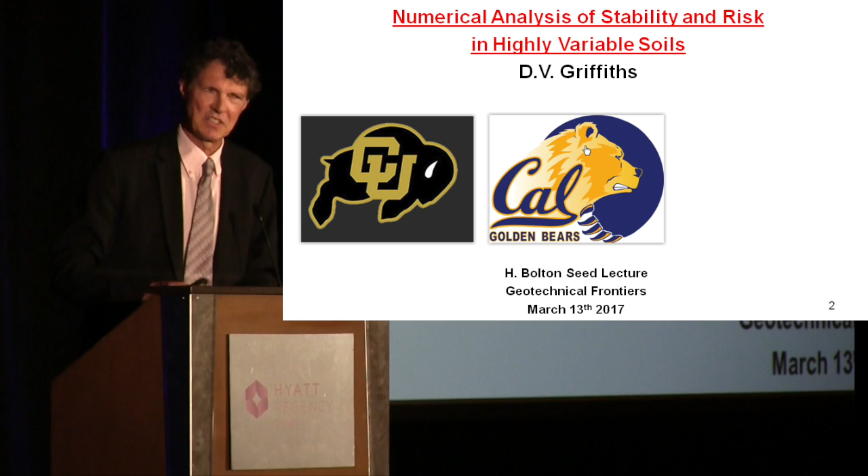So it's really a little bit surreal to be here today, giving the lecture in his name. I've put up a picture of the Cal Berkeley logo, which of course was where Harry Seed made his name and where he stayed for many years. But it did make me reflect briefly on the universities I've had connections with since I've been in the United States. I've had an associate professor's position at CU Boulder - they have to call themselves CU because the UC has already been taken. And at one time I was also on a sabbatical in Princeton.

It kind of occurred to me that these are all rather fierce-looking animals, these mascots. So when I ended up at the Colorado School of Mines - anyway, he's got some dynamite in his mouth, which is sort of a little bit, no one's ever explained it to me properly.

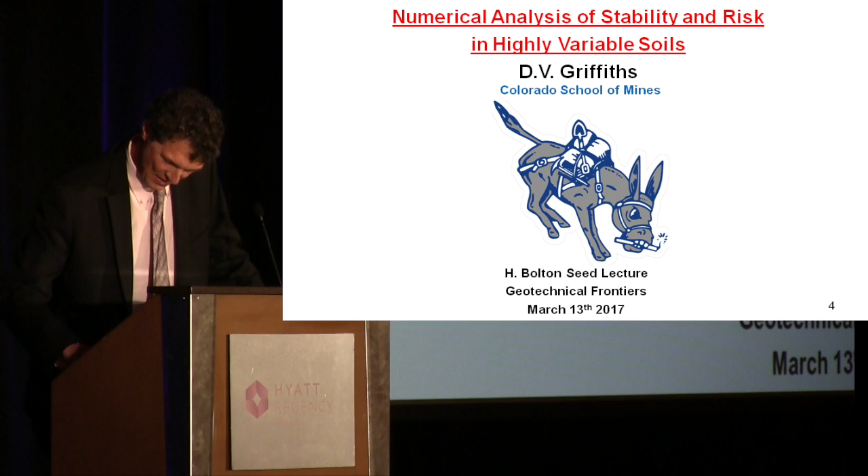Anyhow, I'm very pleased to be here. You know, when I arrived in Berkeley, Harry Seed looked like that, and unfortunately I looked like that. But nevertheless, Professor Seed was extremely accommodating.

I was his teaching assistant for his 270A class that was a staple of the large graduate program in those days. Just one other anecdote, if I may.

I visited Berkeley. In fact, the last time I saw Harry Seed in Berkeley was with my late wife, Valerie. And we visited Davis Hall, where Harry Seed had his office, on the day of a very significant earthquake by the standards of the Bay Area in those days, 1979, August the 6th. Incidentally, that's the same year that Harry Seed gave the Rankine lecture in London.

And I was on my way to Davis Hall, and I was in an elevator going up to the 4th floor. And when the doors opened, people ran into the hallway. There's been an earthquake, and I'd missed it. And to this day, I've never felt an earthquake.

It was fascinating because Harry Seed and Mike Duncan took us to lunch that day in the faculty club, and it was quite an occasion. When I got back to the faculty club where my wife was staying later, she said, I forgot to mention it really - she said, was there an earthquake? I saw the paintings swinging on the walls. So anyway, that was a remarkable day.

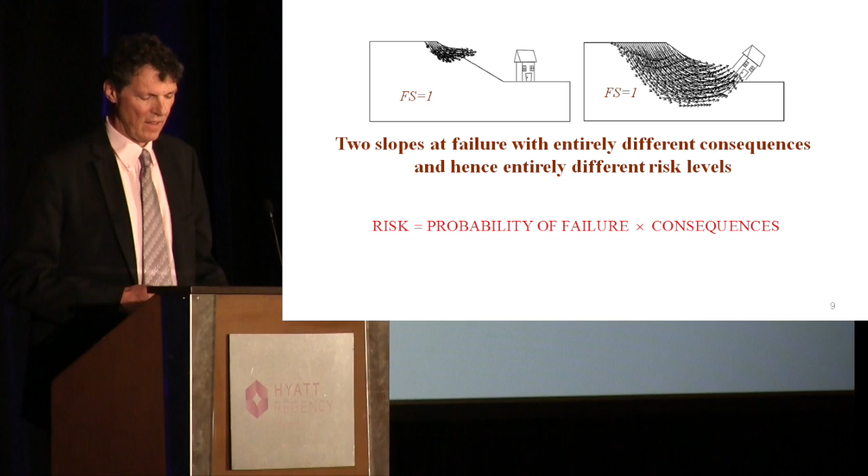Here we have a couple of slopes, both with the same factor of safety of 1. They both failed, but clearly one has much more significant consequences than the other. And here straight away is one of the benefits of bringing in a risk way of thinking. The probability of failure, weighted by the consequences of failure, is the definition of risk. So one can tolerate higher probabilities of failure if the consequences are low.

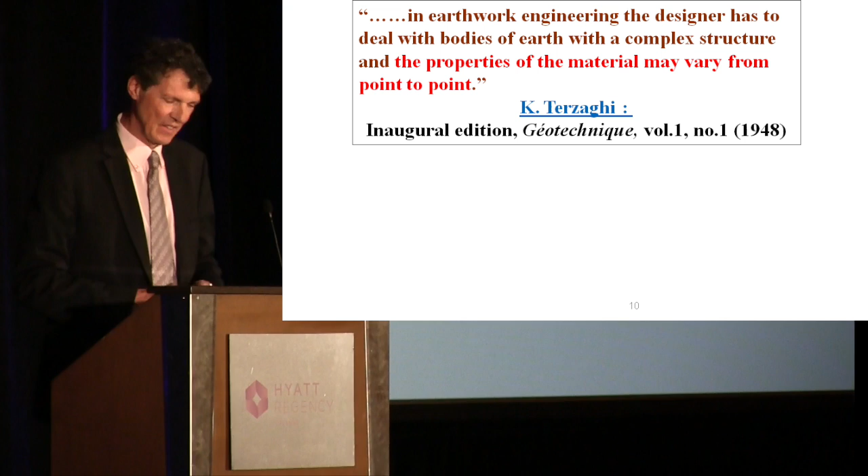There's few engineering materials, I think, that are more amenable to a probabilistic treatment than soil and rock. I'm on the Geotechnique panel nowadays, and looking at volume 1, number 1, they got someone called Karl Terzaghi to say a few words in the preface, and it's interesting to see how he highlighted - the properties of materials may vary from point to point. This is what makes soil complicated stuff compared with other engineering materials.

And incidentally, the same year, a very influential book, I think, by D.W. Taylor was published, where in his introduction he also drew attention to this inherent difficulty in geomaterials. How do you model these things when the properties are varying all over the place?

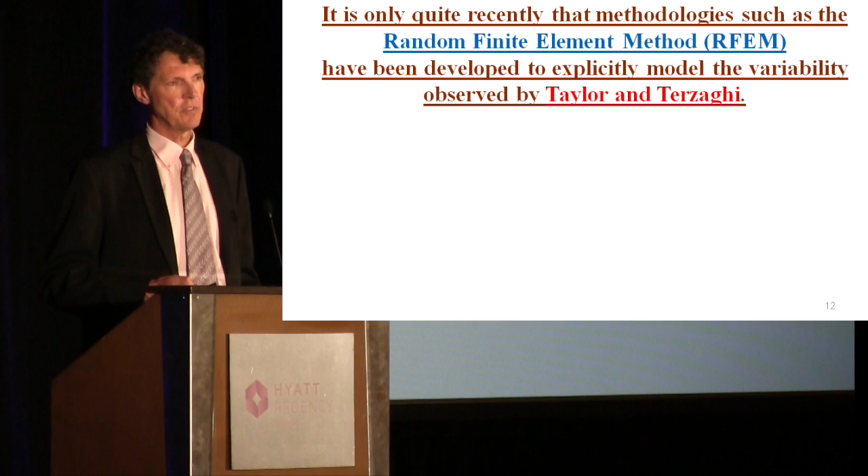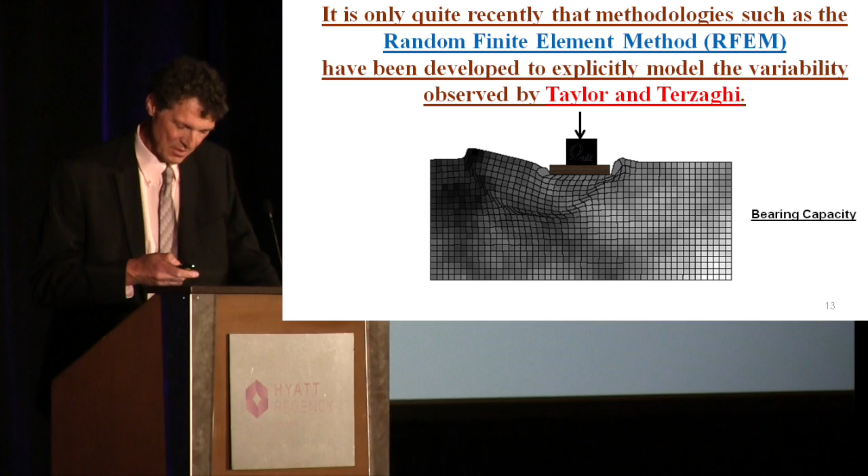A little bit more about this method later. The dark and light zones refer to a whole spectrum of strength parameters. It's funny, when you have a random material or a variable soil, quite rarely do you get the classical symmetrical mechanism that you would see in textbooks of Terzaghi's bearing capacity theory. It nearly always goes one way or the other.

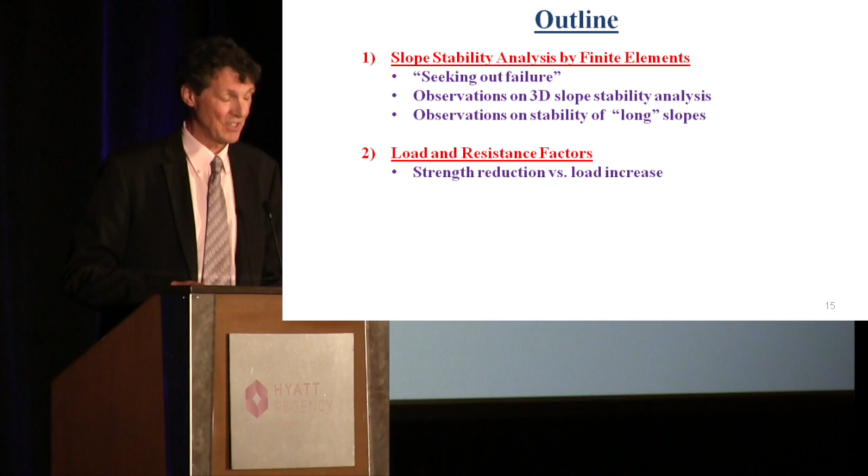Here's an outline of my presentation. I'm going to talk initially about slope stability by finite elements, which seems to be a growing topic of usage in practice and academe, and I'll make a few observations about the benefits of this approach. Then, maybe slightly out of context but something that's interested me recently, the growth of LRFD as a way of dealing with variability by factoring the loads and resistances differently. Maybe you have more than one factor of safety going on at the same time. I will briefly review risk assessment tools in geotechnical engineering, but we won't get too deeply into them today. I'll summarize what I call 3 levels of probabilistic analysis, and then some concluding remarks.

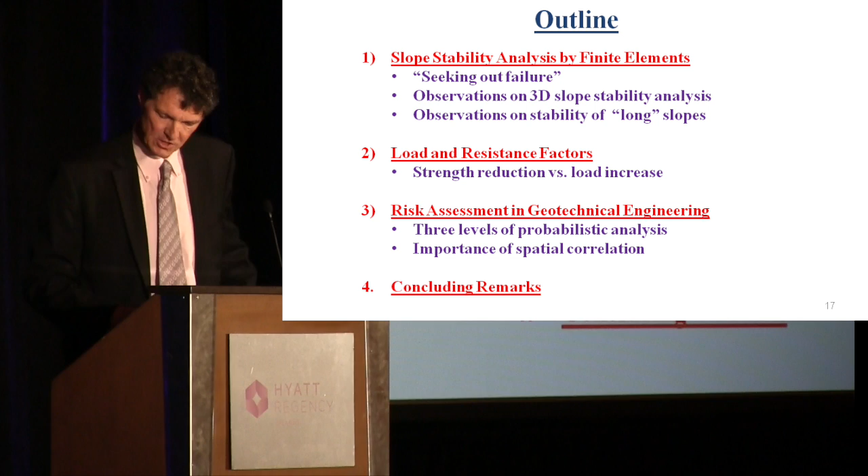So let's move on. What is slope stability by finite elements? Well, you design a finite element mesh to represent the geometry of your slope, which could be quite complex. We apply some gravity loads to that slope based on the unit weight of the soil. That's a fairly standard algorithm in finite element programs. We'll have a very simple stress-strain law, elastic, perfectly plastic, and the plastic plateau is governed by Coulomb.

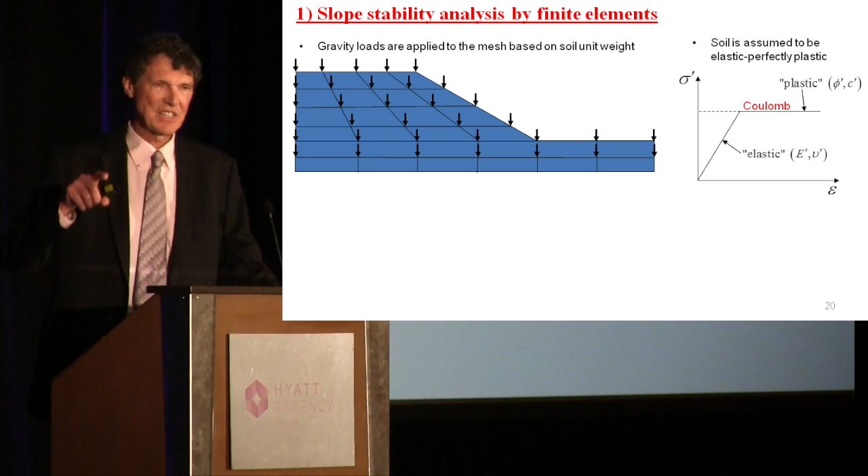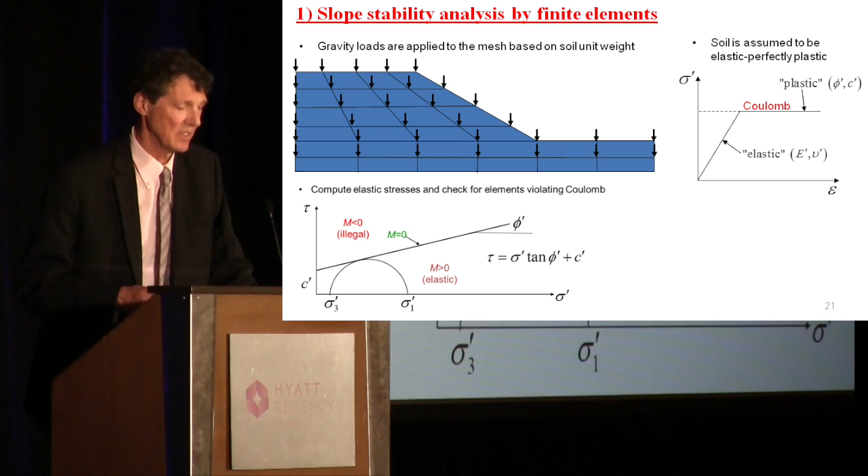Then we'll do an elastic analysis initially. Forget the plasticity, forget Coulomb, we'll just do an elastic analysis. We'll look at each element to see if they have violated Coulomb. So we have a little function called m. If m is negative, we're in illegal territory, and we shouldn't really be there. If m is positive, then we're still elastic, and probably things are okay.

If an element is violating Coulomb, we're going to turn on a little stress redistribution algorithm that will sort of move the stresses around a little bit. Offer the stresses to the neighbors and ask them to pick it up. In their turn, it may cause them to violate Coulomb if they pick up some load from the neighbors. So this is an iterative algorithm, and it may take quite a few iterations for everything to settle down, for all the elements to satisfy Coulomb, and of course equilibrium — all the stresses can be moved around, but they must still satisfy equilibrium with gravity.

To find the factor of safety, we'll use a strength reduction approach, which means we gradually weaken the soil by dividing by an ever-increasing strength reduction factor until nodal displacements in our mesh rapidly accelerate. When this happens, along this top axis here, you'll see the strength reduction factor being increased. At some point, something pretty critical happens — the displacements magnify very quickly. At that point, the strength reduction factor is the factor of safety.

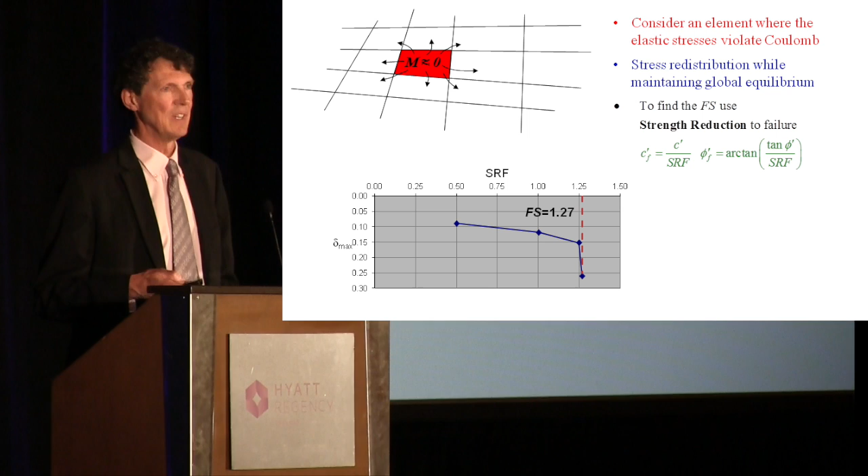This is the same definition of the factor of safety that is used by Bishop or the ordinary method of slices or any other method. It's just come at it from a slightly different direction, but this is the same factor of safety.

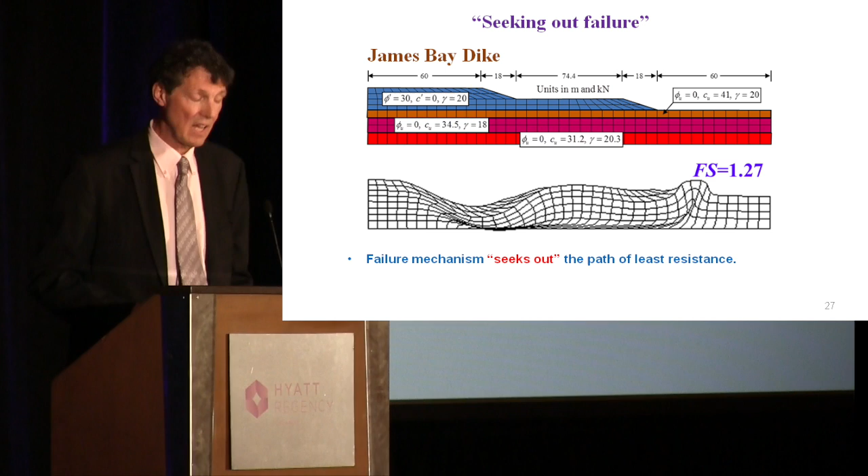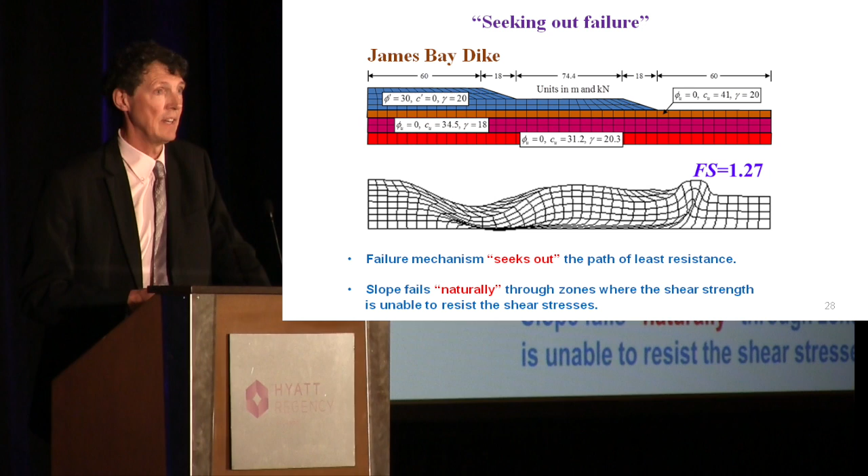One of the benefits of the finite element method, I think, for slope stability is that it seeks out the critical failure mechanism. It finds the weakest path through the soil where the strength is unable to satisfy the stresses that are being asked to support. The user doesn't have to, in advance, anticipate where the failure mechanism will be — the critical failure mechanism comes out of the analysis automatically.

We can see some other interesting examples. This is a layered soil in which we did strength reduction — 3 different undrained clay layers. Here, in fact, we have 3 mechanisms all occurring with the same factor of safety. I just ask on the right whether a traditional limit equilibrium approach would be able to find all 3. I wonder if you were using limit equilibrium, you might find one and think that was it.

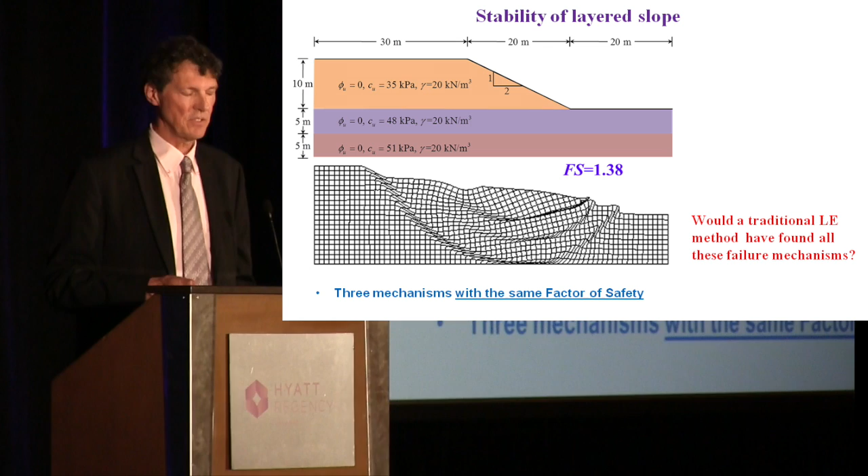Even if the limit equilibrium method could do this, and I'm sure you could with sufficient search, this comes out naturally from the analysis without the user having to tell it where to look.

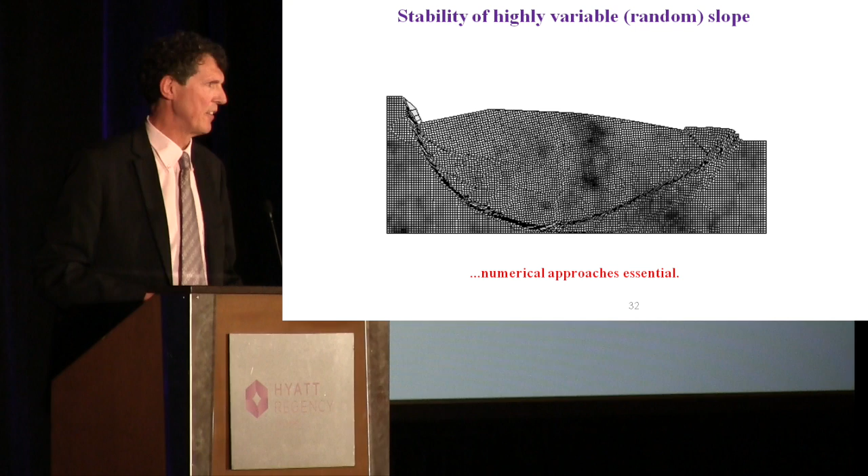So what hope is there for a random field then, when we're trying to find the stability of a slope with highly variable soils varying according to some statistical distribution? I think a numerical approach is essential for this kind of complex problem, where we have circular and planar type failure mechanisms, and also some curious little berm type failure up here.

One thing also about the finite element approach which I find intriguing is how robust it is. Even coarse meshes, while they don't give you quite such a nice failure mechanism as a fine mesh, they all give very similar factors of safety, and this is a benefit. I think the user doesn't have to worry about mesh design quite as much as you would imagine. Certainly other methods, for example, limit analysis methods, do have problems sometimes with mesh design.

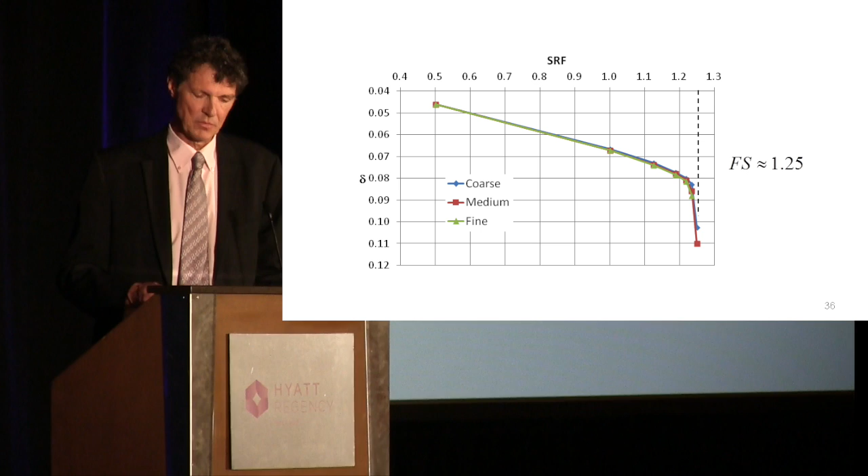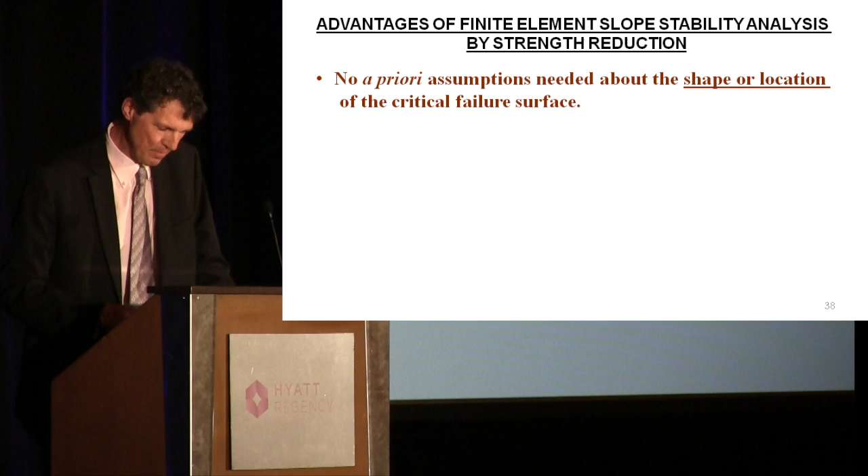So just to summarize then, what I believe are the advantages of the finite element approach for slope stability is: we don't have to make any a priori assumptions about the shape or location of the critical failure mechanism. It's been numerous times we've validated it against limit analysis, limit equilibrium, and chart solutions.

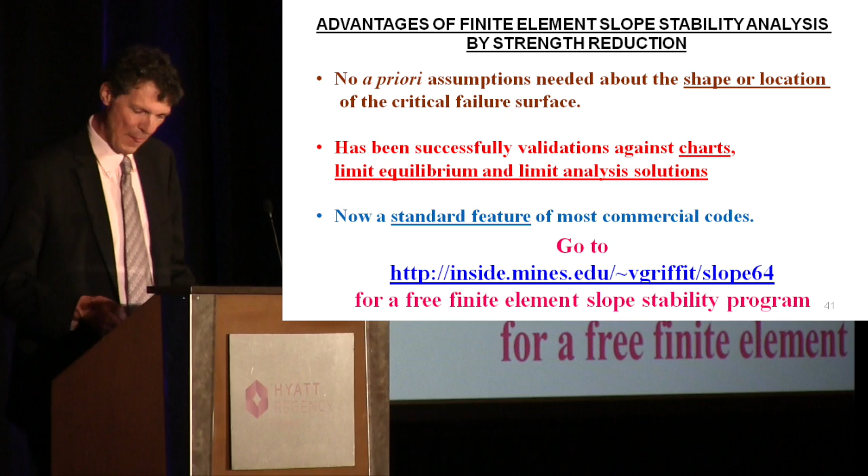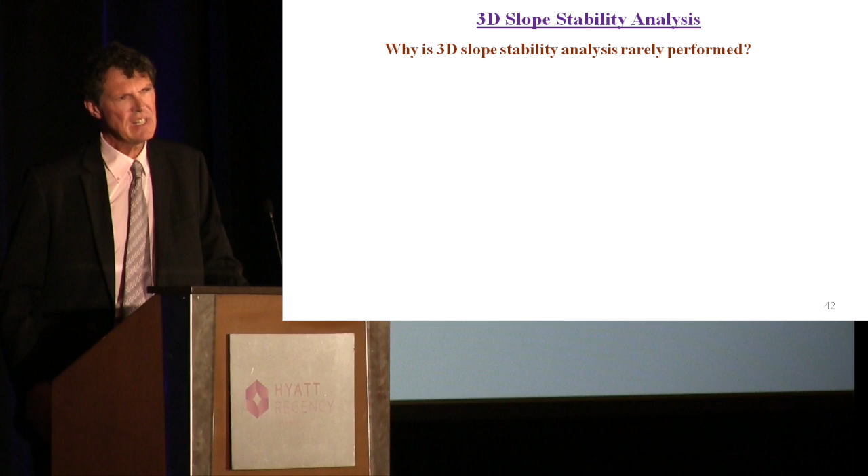A couple of other quick examples just to show where I think we can benefit from the finite element approach: 3D slope stability analysis, and my apologies to one or two of you who've seen this one before, probably. But 3D slope stability analysis is rarely performed, and I think there are 2 main reasons for that. Limit equilibrium methods become pretty messy in 3D.

Methods of slices become methods of columns, and imagine the mess we get into with side forces and all that stuff. In a finite element approach, I think it's more of just a third, if you're into Fortran, a third do loop would get you to 3D from 2D.

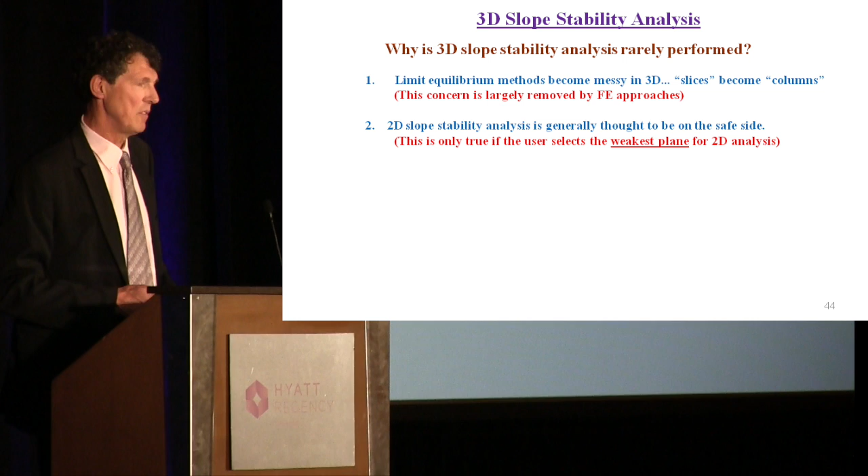The other point I think that is more or less a received wisdom is that 2D is generally thought to be conservative, on the safe side. So why bother, go to all that trouble?

My point in this 2 or 3 slides here is just to emphasize point 2 a little bit. I think 2D is conservative, so long as the most critical 2D section is selected. And that may not be obvious. Which is the best 2D section, the most conservative?

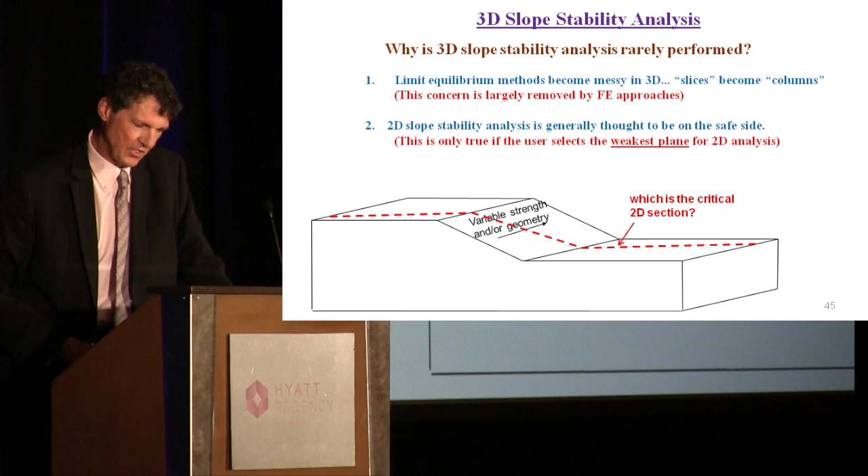To look at this, we set up a rather contrived problem here: a slope with a diagonal layer of weak soil running from top left to bottom right, and ask the question, which is the critical 2D section for this particular problem? Maybe it's one of those, just going right across the section, perhaps. Or maybe even the one right down the weak zone, a little bit flatter, that slope, but entirely weak.

So we ran all these by finite elements. And by the way, there are 3D programs available for download if you're interested. A genuine 3D slope strength reduction approach gave us a factor of safety of 1.52 for this slope. So if I may, I would like to call that the factor of safety of this slope, 1.52, based on our usual understanding of a factor of safety.

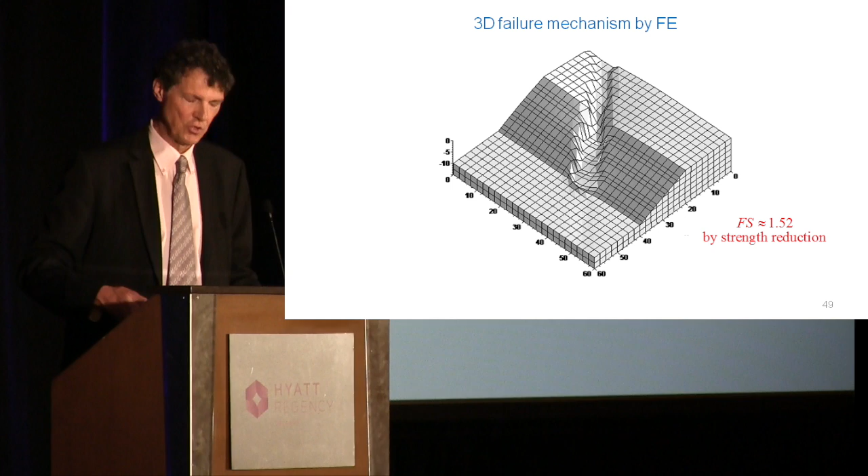I suppose some people would naturally say, well, only a fool would take a 2D section out on the edges where all the soil is strong. I accept that, so the 2D section is safe in the middle. The 2D section right down the weak zone with a flatter slope was tremendously conservative. I think even by our standards, we would have thought that was overdoing it a bit. But the truth is, 2D sections are conservative so long as we choose them carefully, and that may not always be obvious.

Another game we can play with the finite element approach is to ask a slightly flip question: how long is an infinite slope? How long is infinity? I think teachers of geotechnical subjects love the infinite slope because it's a nice closed form solution. It's the only slope, I think, that has a formula for Fs equals, and there it is on the right.

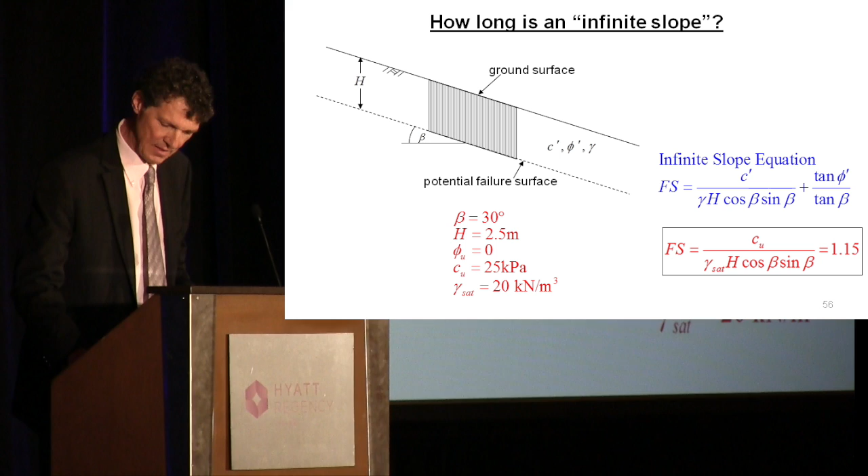If we take a particular case, let me choose some properties. If I fix the properties and the slope angle as shown here, we will get a factor of safety of 1.15 by using the traditional infinite slope equation.

So let's have another look at this with a finite element model of a long slope. How long is long is the question we're trying to address here. L is this width at the bottom of the figure, and H is the thickness of the soil.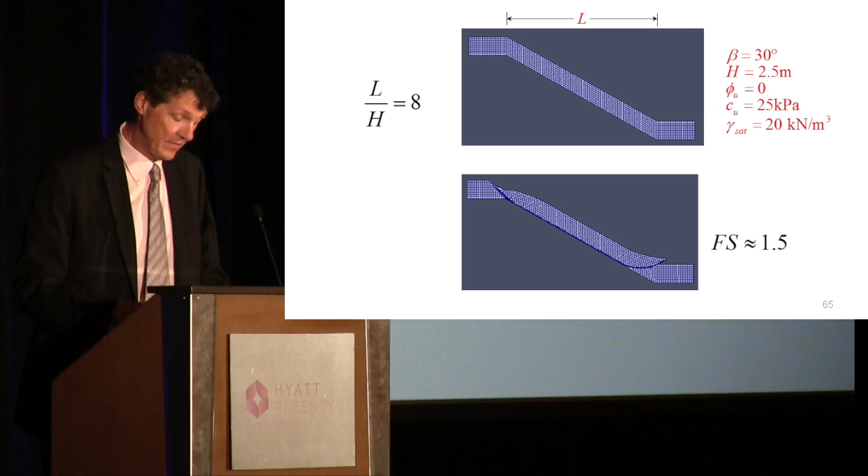If we lengthen it further, we're starting to get the translational type mode of failure, which is central to the infinite slope equation. Then I'm giving up after 8, so don't worry, there's no more, but L over H of 8 is now starting to resemble at least a translational failure. But the factor of safety is still quite a bit higher than the infinite slope.

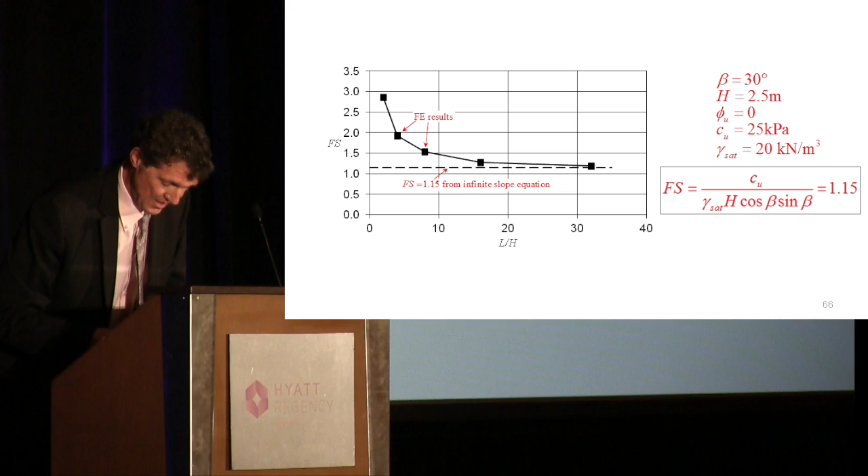Here is a summary. The horizontal line is the infinite slope solution, and here are the finite element solutions with increasing L over H. We can conclude a couple of things, probably not exactly new: the infinite slope equation is conservative. You're on the safe side for sure if you use it. And it seems, at least for the particular properties I chose, that when you get to about L over H of 20 or more, we're roughly in the ballpark of using an infinite slope equation without it being too conservative.

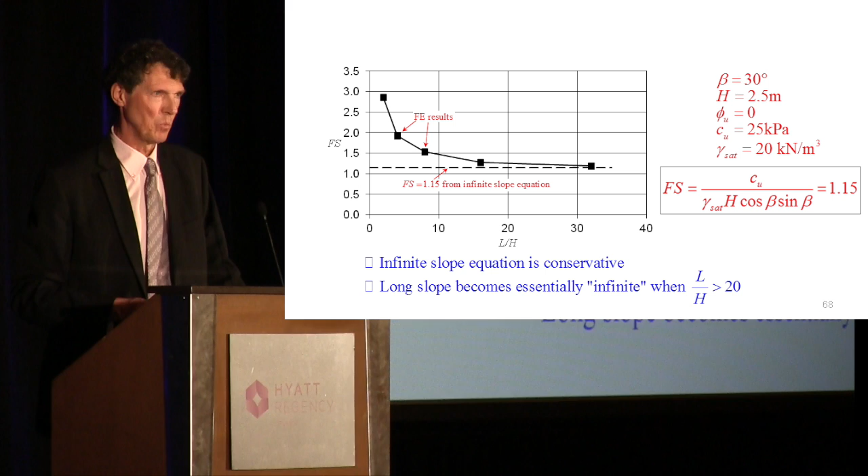Okay, part 2 of my presentation is just a few words on load and resistance factors. I think the geotechnical community have sort of realized that this is something that may be here to stay, where we increase the loads by some factor to be on the safe side, and we reduce the strengths by some factor to be on the safe side. But we can tailor those factors according to how much we know about the various aspects of the design. So it's certainly a logical approach, but I suppose there's some dismay at the plethora of factors compared with the nice world where we used to have just one.

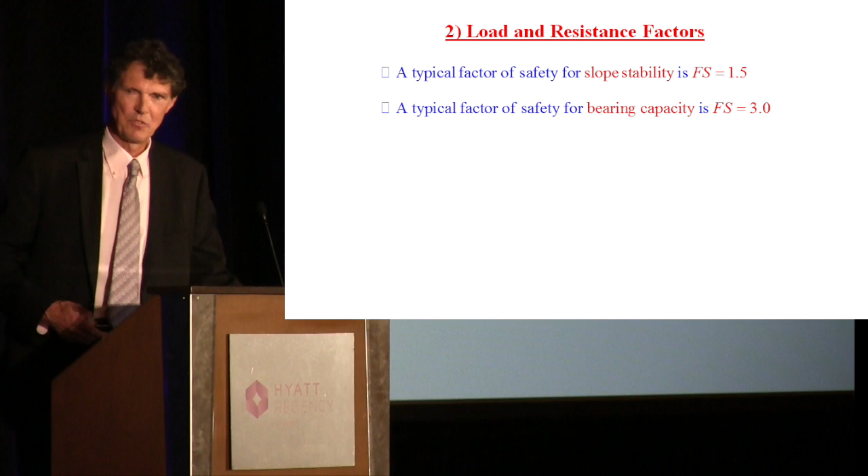Really, it's that one factor of safety I want to look at quickly here. I've taught soil mechanics and foundations quite a few times over the years. Slope stability problems have a factor of safety of 1.5, and bearing capacity problems have a factor of safety of 3. What's that? It never seems to say anything except in Duncan and Wright's book, which is about the only place where this is explained slightly. But my question then is, does this mean we design foundations to be twice as safe as slopes?

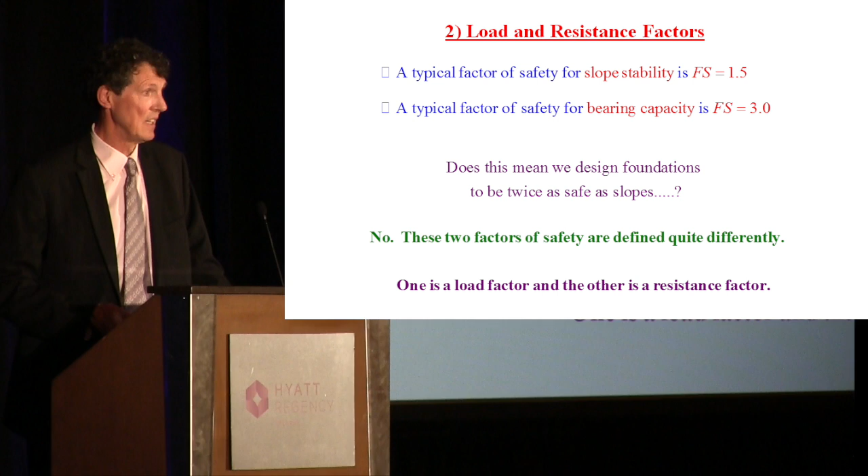Well, obviously, the answer is no. These factors are quite different. These factors are not the same animal. They cannot be compared directly. One is a load factor, the bearing capacity one is a load factor, and the slope stability one is a strength reduction factor. And I think that's something that needs to be emphasized more in textbooks nowadays.

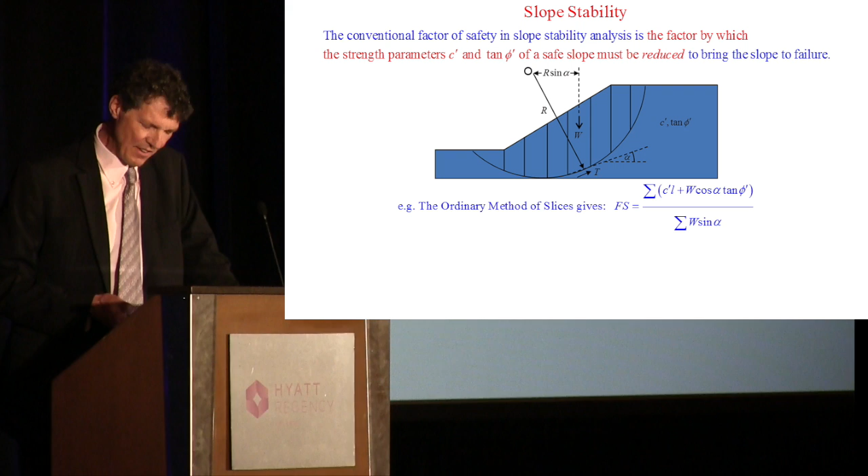But the slope stability one, we can easily see that it's a strength reduction factor. Here I've just taken the ordinary method of slices for illustration. Here's the formula, the summation if you're doing the slices. If you want to make the factor of safety equal to 1, you just divide both sides by the factor of safety. And that means that we have a strength reduction factor. We have to reduce the strength by Fs, and we have to reduce the cohesion and the tangent of the friction angle by the factor of safety. So this is obviously a strength reduction factor of safety.

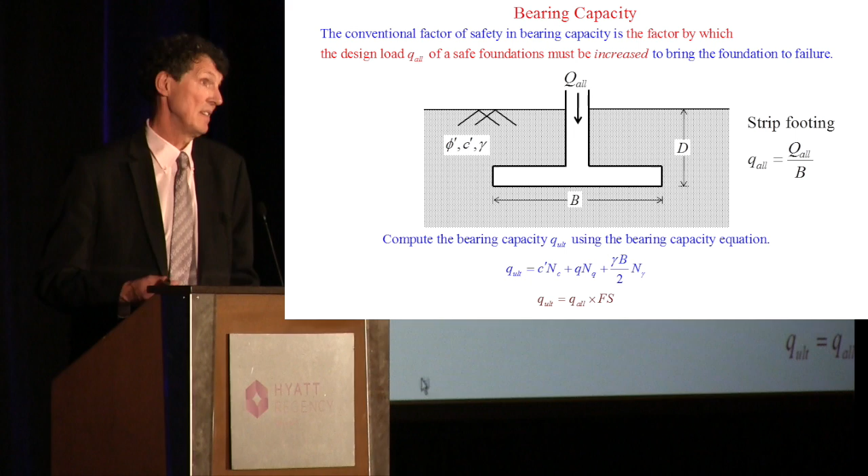On the bearing capacity side, however, if we just take a typical strip footing and Terzaghi's bearing capacity equation, we could calculate the ultimate bearing capacity using that formula, and then the allowable value is related to the ultimate value by a factor of safety, which is a load increase factor of safety. What we're saying here is that in order to cause a bearing capacity failure, we'd have to increase the allowable loads by 3, typically, for a factor of safety in bearing capacity. This made us wonder a little bit about why this evolved this way historically in soil mechanics and geotechnical engineering.

Why can't we do slope stability by load increase instead of strength reduction? Well, we can do it quite easily in a finite element or a limit equilibrium approach for that matter.

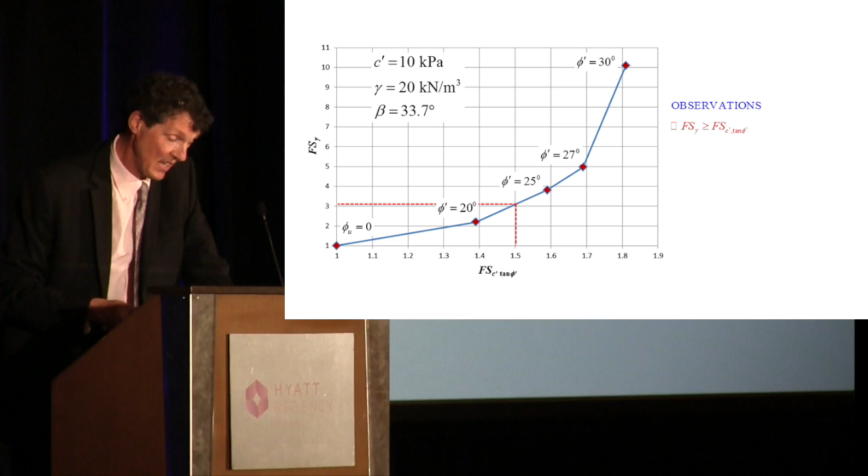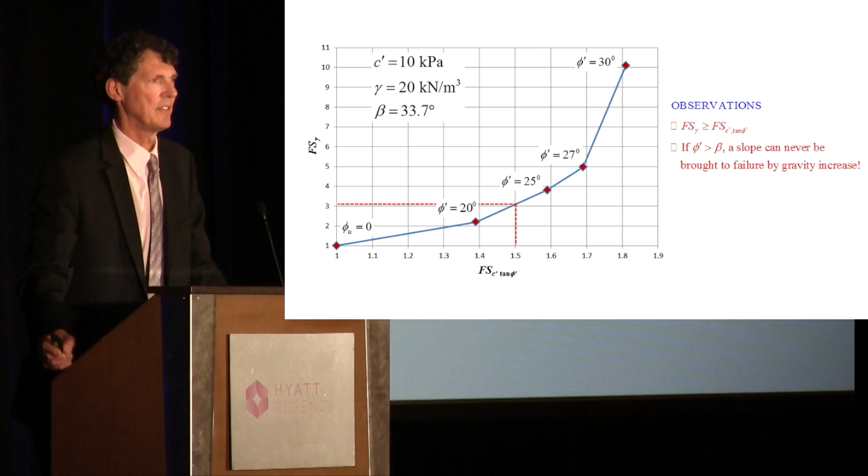There's a couple of observations we can make here. Firstly, the factor of safety on strength reduction is always less than or equal to the factor of safety on gravity increase. Maybe this is a good reason why slope stability analysis never evolved with a gravity increase approach. If the friction angle is greater than the slope angle, you can never bring it to failure by gravity - it will just always be safe. So this line is actually tending to an asymptotic result at 33.7 degrees, which is the friction angle equal to the slope angle. So that's a good reason for not doing gravity increase, I think.

On the other side, let's have a quick look at bearing capacity by strength reduction. Why don't we do that? Why did it not evolve in that way?

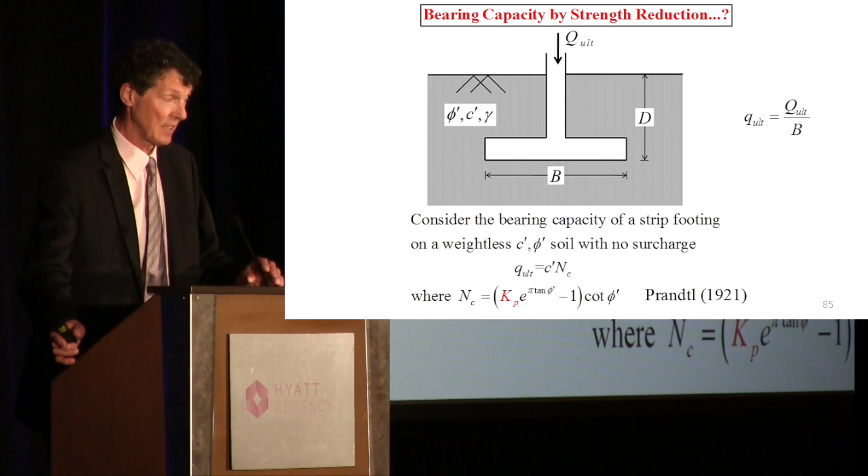Well, to make a point here, I'm taking the Terzaghi bearing capacity equation, and taking a bit of a liberty - I'm just taking the first term of the bearing capacity equation, which is a little bit naughty, but the conclusion I'm going to reach is the same whether I include all terms or not, so it just makes life a little simpler. The bearing capacity factor, NC, is a classic solution - it's a Prandtl solution, a closed form equation. NC depends on the friction angle, as do all the bearing capacity factors for that matter, and you can see NC depends on this rather interesting formula involving Kp and tan phi.

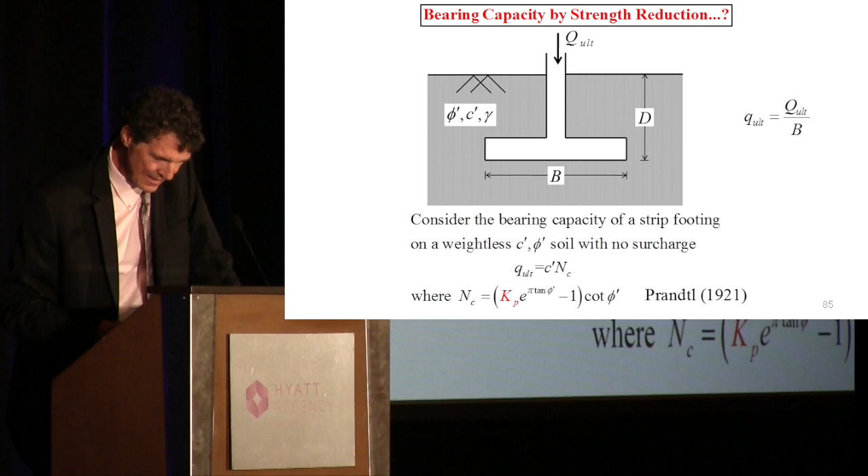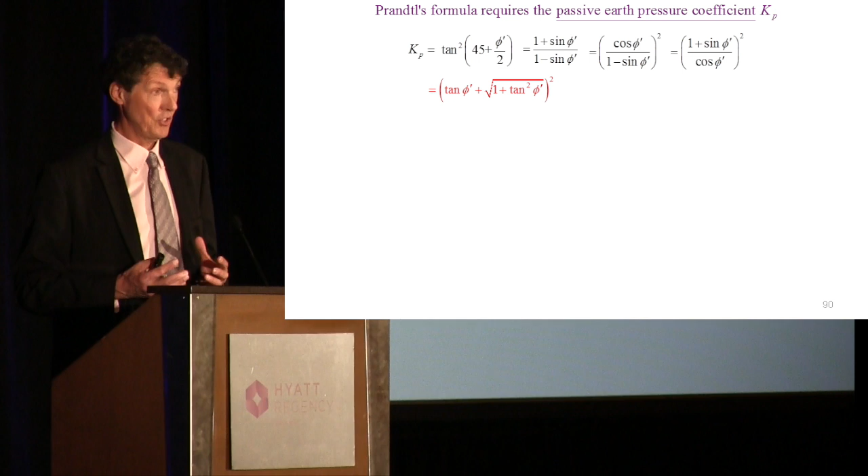So let's look at Kp. I think most people use this version - tan squared 45 plus phi over 2. But if you like trigonometric identities, that's also Kp, and that's also Kp, and that's also Kp. And I'm not satisfied yet - there's one more that we dreamt up in an obscure conference paper quite a few years ago. What I like about this version, and I'm not expecting this one to catch on in undergraduate soil mechanics, but what I like about this one in red is that it depends on tan phi only.

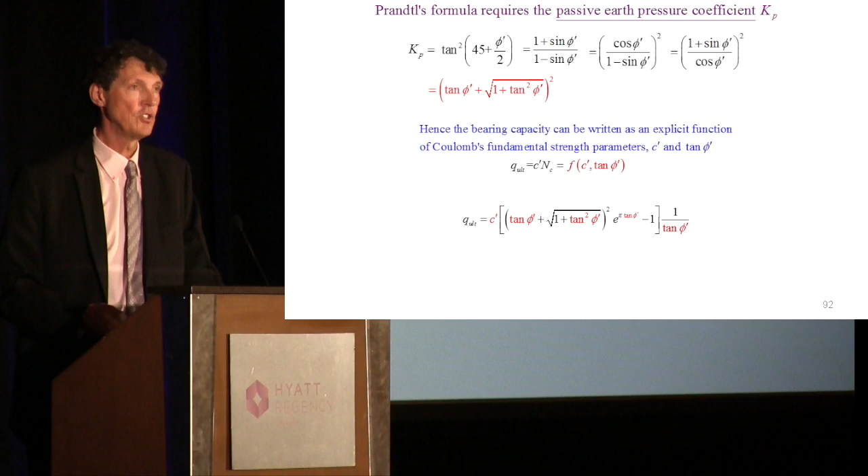So we've kind of isolated the tangent of the friction angle, which really is the fundamental variable in Coulomb's equation. We've managed to write the bearing capacity of this footing as an explicit function of cohesion and the tangent of the friction angle. I haven't included all the mathematics here, but it's not too messy. Here is the bearing capacity equation written with our new look Kp factor, and we can see that Q ult, the ultimate bearing capacity, depends on C and tan phi. So we can do strength reduction analytically on this and get some formulas to plot, and compare the two factors of safety like I did just a few minutes ago for a slope.

So here we go, here's the result we get. The equations are published elsewhere if anyone wants to follow it more closely. Again, the friction angle matters - it affects the relationship between the strength reduction factor of safety and the load increase factor of safety.

Of course, the load increase factor of safety is what we normally do. That's the traditional approach. You can see once more that a factor of safety on strength reduction of 1.5 is about the same as a factor of safety on load increase of 3, now called Fs subscript Q.

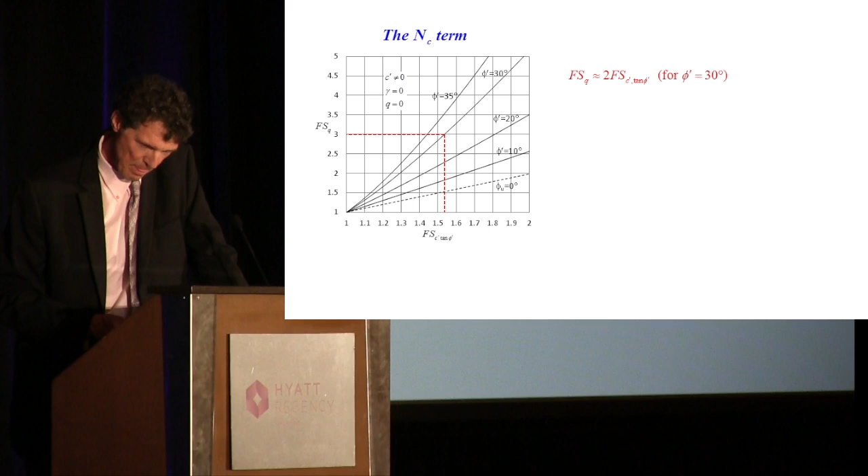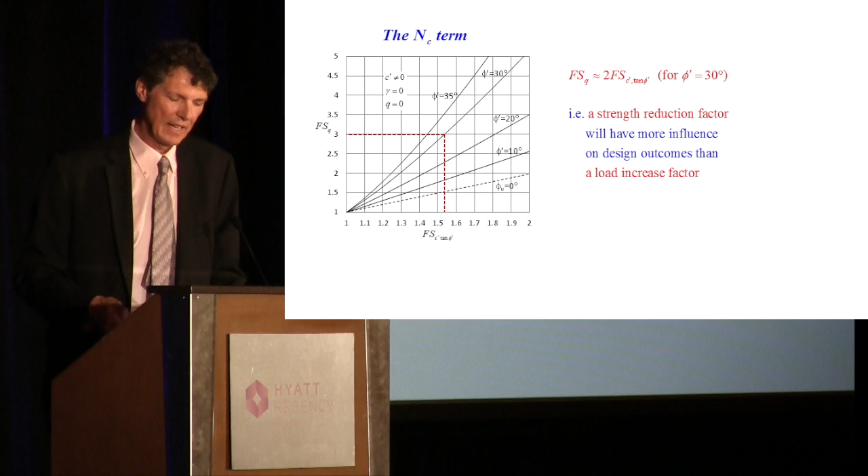It does also tell us that strength reduction factors are more influential. A design is more sensitive to strength reduction than it is to load increase, which may have implications for some of these tables we see of load increase and strength reduction in the codes.

By the way, we could come to the same conclusion with the other two bearing capacity factors. They give very similar results.

All right, so part 3. How are we doing? Let's see.

Good. Right, so we talked earlier a little bit about finite element methods being good for variable soils, seeking out the failure mechanisms naturally. So this should be an important tool for us to use if we want to do a risk assessment. But first, let's just define the goal of a probabilistic geotechnical analysis.

I think fundamentally we're trying to calculate the probability of failure as an alternative, or more likely, a complement to the factor of safety that is traditionally used.

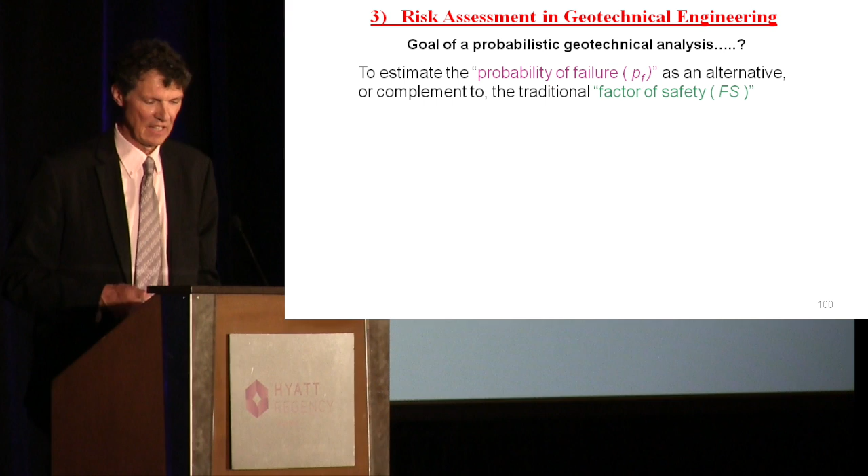I know there's lots of different terminology out there. Some more optimistic types prefer to use terms like reliability, and maybe probability of design failure doesn't sound quite as bad as just probability of failure, which is a little bit dramatic. Certainly if it's a dam sitting above a large city, that would be a probability of failure. If it's a traffic light phasing down International Boulevard going out, you might call that a design failure.

Reliability is typically just 1 minus the probability of failure. So probability of failure can never be less than 0 or greater than 1, and the reliability is just 1 minus that number. Reliability index is a little bit more obscure. It's based on standard deviations and so on, but we won't worry about it too much.

So here's an obvious question, I think, just to get started. Since we're trying to replace or at least complement the factor of safety with a probability of failure, what on earth is the relationship between the probability of failure and the factor of safety? It seems like a logical question to ask.

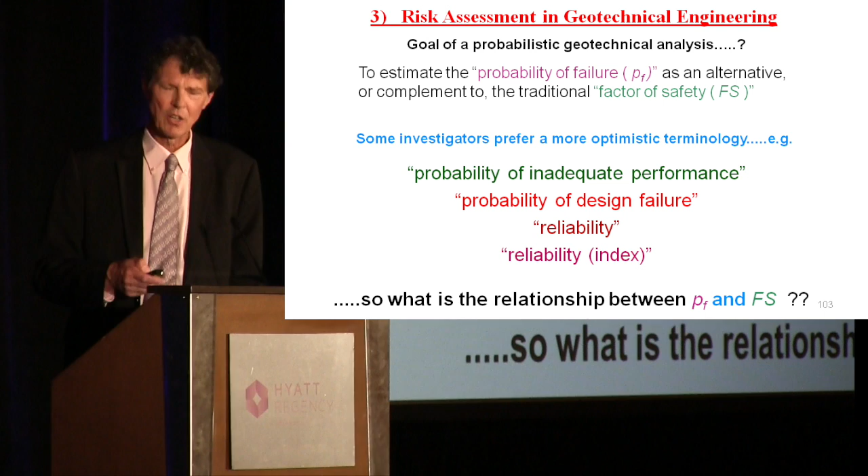And for that, I turn to a very well-known example that I'm sure many of you have seen before. Let's take a couple of slopes, traditional uniform slopes. Here I've got the cohesion and the geometry is the same in both cases, but one has a higher friction angle. And if you go to charts or limit equilibrium, you'll find that example 2 gives a higher factor of safety than example 1. No surprise there, it has a higher friction angle.

So slope 2 is safer, right? Well, you probably already guessed this is a trick question, right? Now somebody annoying comes along and does a probabilistic analysis and says, hey, wait a minute, these two sites where you have your slopes are quite variable. And site number 1 has a certain variability of soil strength, and site 2 is even more variable.

And in fact, after some analysis, this individual has come up with some statistical descriptions of the factor of safety that says the mean factor of safety of the first example was indeed 1.5, which is what you found out earlier, but it has a standard deviation, which is a measure of the spread of results of 0.18. And example 2 has a mean factor of safety, which is indeed 2, which is what you came up with earlier, and a standard deviation of 0.5, rather higher.

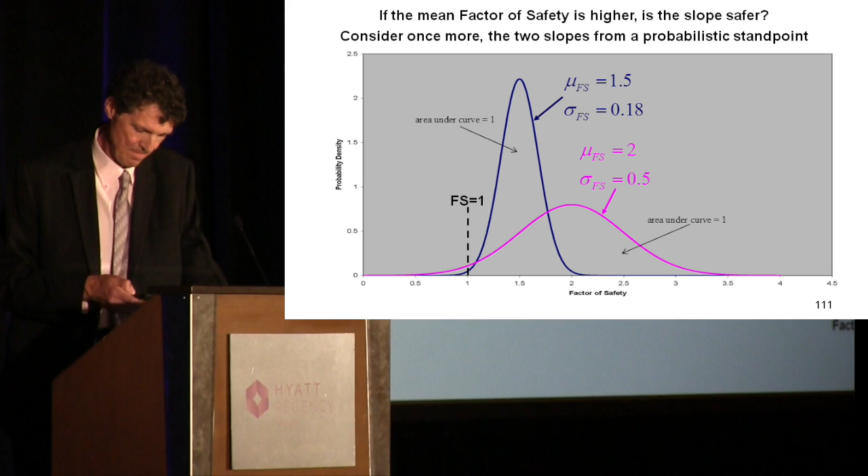The probability of failure is the area of the curve to the left of the factor of safety of 1 - this is failure, Fs less than 1. If we look at a little detail of that bottom left corner, you can see what's going to happen: the so-called safer slope has a larger probability of failure than the other slope, which has a smaller area. So we've got this contradictory result that the safer slope has a higher probability of failure.

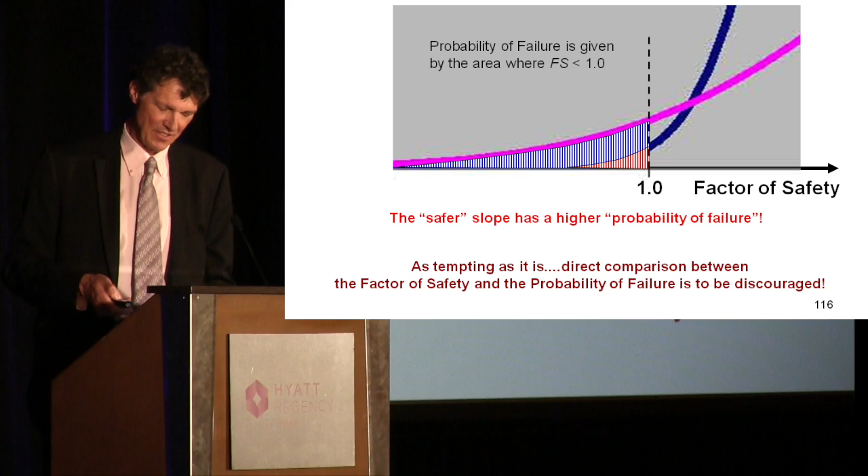Now, this is a pretty depressing thing to show everyone. I don't want to put you off doing this stuff, but this is just something to bear in mind - and I feel quite strongly about this - direct comparisons between the factor of safety and the probability of failure are to be discouraged. They are not the same thing. For a start, the factor of safety is based on one number, the factor of safety itself. The probability of failure is based on at least two numbers, the mean and the standard deviation. And I know a lot of papers are written where this point is not discouraged enough.

The definition of risk I touched on earlier, right at the beginning of my presentation - it's the probability of failure weighted by the consequences of failure. Just down the road from me in Golden, Colorado, I have the Bureau of Reclamation, who are responsible for hundreds of dams in the western United States mainly.

And they define risk as a three-step formula: it's the probability - P for probability - of some critical event occurring, maybe an earthquake or a severe rain, weighted by the probability of system failure given that the event has occurred. It doesn't always follow that you'll have failure - we know about San Fernando, just hung in there, right? Finally, weighted by the adverse consequences given the failure, measured in terms of loss of life, infrastructure costs, or a combination of both.

What is acceptable risk? I know J.L. Wright is interested in this topic very much here at the front. It's not for me to get involved in this one too much - it's very site-specific, depends entirely on the kind of project that's being considered.

This is a classic graph from Baecher in 1982 that has appeared in many other incarnations since then, but the general idea is still as true as it ever was. Along the top x-axis is lives lost, the bottom x-axis is cost in infrastructure, in 1982 dollars. Up the y-axis we have the acceptable annual probability of failure.

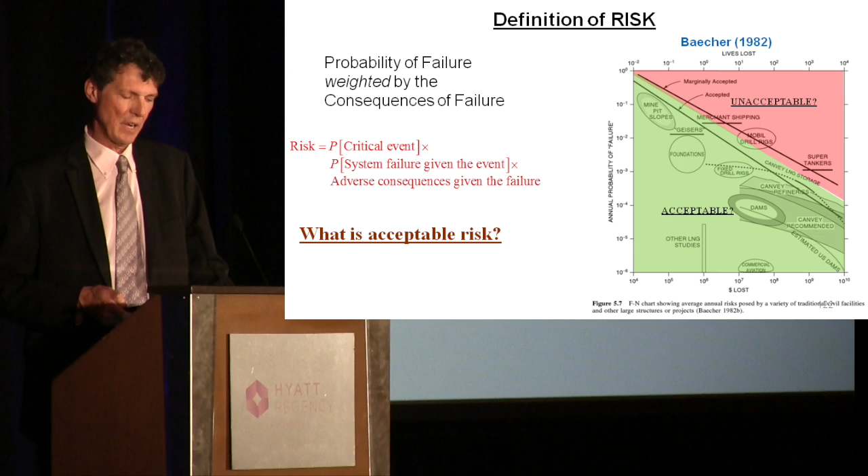The black lines imply the division between acceptable and unacceptable. I suppose some people have looked at Katrina and New Orleans, after the event of course, and decided that the levees in that event were, at the time, in the unacceptable range, given the risk to human life.

How do we do a probabilistic analysis, though? How do we actually calculate the probability of failure, and therefore the risk? I have three levels here which I'm going to touch on briefly. The first level is really the one that's used in practice - this is the state of practice called event trees, where an expert panel get around a table and thrash out some probabilities for a design. I'll show you a quick example of that.

Another step up, a little more mathematical but something that's absolutely doable on a laptop in a few seconds, are the first order methods - I'll give you a quick example of that. And then finally, there's the whole family of Monte Carlo methods, where you just crank the handle over and over again, repetitively calculating something until statistics settle down on whatever it is you're trying to find.

Event tree - I'm grateful to Suzanne Lacasse for one or two of these slides, from a Rankine lecture from 2015, I borrowed this from her. An event tree is a graphical representation of many chains of events that might result from some initiating event. Some of the chains may lead to failure, but many will not. The branches are so-called because off each node you get branches, and more branches coming off those branches, and each branch represents some event that might happen.

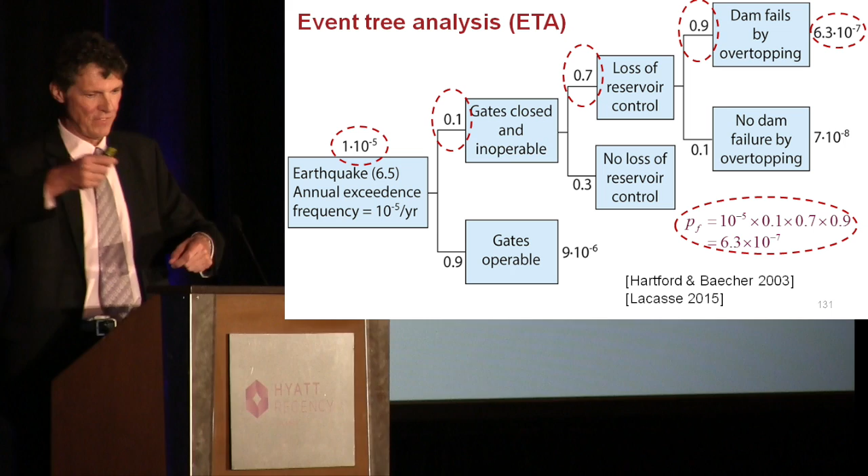These things can occupy many pages of reports. You sort of unfold. These branches can go on for quite a long way.

Level number 2. These involve some mathematical calculations. They're very easily done on an Excel spreadsheet, for example. I have just about all the programs I'll mention in this lecture available on my website for download for anyone who's interested. This is coming back to a bearing capacity problem, for example.

Let's make the cohesion and the tangent to the friction angle random variables. So here at the bottom, you see I've given the cohesion a mean and a standard deviation, and I've given the tangent to the friction angle a mean and a standard deviation. Let's assume they're normal distributions, which is the simplest assumption one can make.

And just to add a bit of spice, let's assume that these parameters, C and tan phi, are actually negatively correlated, which is to say they're not entirely independent of each other. A negative correlation implies that when tan phi tends to be higher than its mean, the cohesion will tend to be lower than its mean, and vice versa.

That's a controversial assumption. Some people believe it, and I'm happy to bring it in for this demonstration.

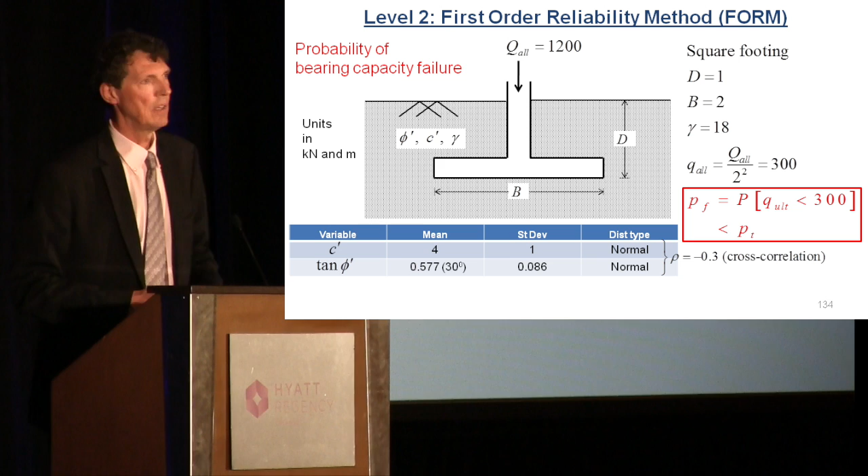If the allowable bearing pressure that we're designing this thing to is 300 kilopascals, let's say, then I suppose the probability of failure should be defined as the probability that the bearing capacity falls below 300. What is the probability that the bearing capacity will be even less than the allowable bearing pressure, including a factor of safety of 3 or more?

The first order reliability method, which is what I'm discussing now, is really an optimization method. If you consider 2 random variables, instead of a single normal distribution, you get a hill, right? It's the 2D version. And the top of the hill represents the mean values of those variables. And as you get out into the tails, the probability of those variables occurring are much, much smaller.

There is actually an infinite number of solutions that might cause the bearing capacity to be less than 300. The cohesion could be exceptionally low, or the tangent of the friction angle could be exceptionally low, or both. But as you get out into the tails of this thing, values out here are extremely unlikely because the areas are extraordinarily small. We're much more likely to have values up here, near the top of the hill.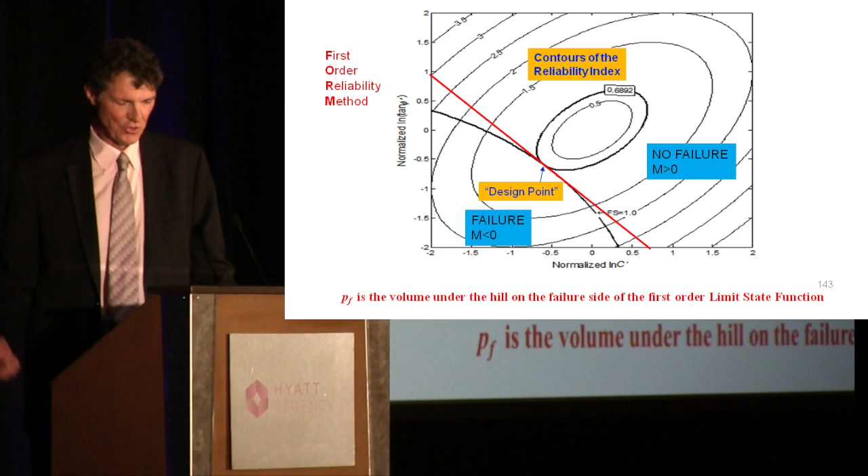It's called first order just by the way because it approximates the solid black line by a linear function at that point, which I've exaggerated here a little bit. Quite often, I'm yet to find a problem where that linear assumption is worrying, but I've drawn it rather more exaggerated here to emphasize the difference.

There are plenty of proprietary codes that you can buy to do this, but here I've set up this very problem using my own in-house version.

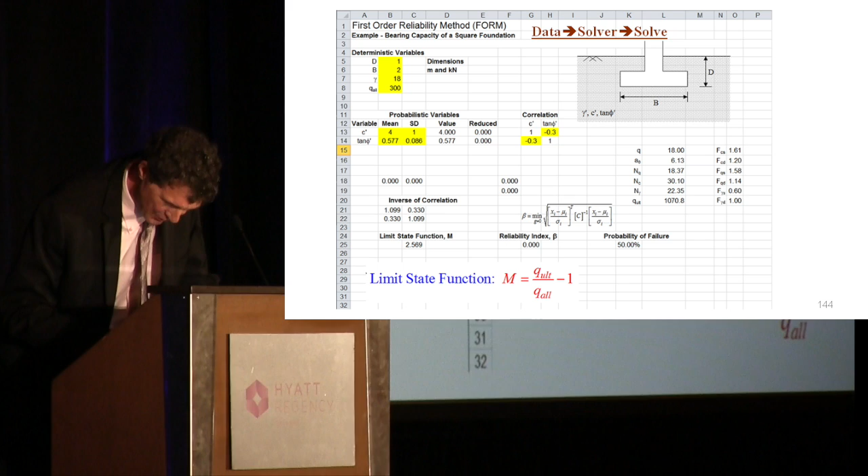The yellow numbers are the ones that the user would supply, the input. Without getting too bogged down in it right now, I'm happy to show it to anyone later, but if you use the solver function in Excel, which I'm sure many of you are familiar with, we can optimize this, and if I run the solver, then a few seconds later, you will get a probability of failure and a reliability index. By the way, those are uniquely related. The glass is half full on the left and the glass is half empty on the right.

So FORM does a little optimization with some restraints and constraints. This level is the final part of the discussion of risk assessment methods - a vast topic. Monte Carlo will get you there eventually. You just hammer away, repeatedly calculating something until the statistics of the thing you're calculating start to stabilize, and at that point you say okay, we've done enough, and we can stop.

I've set up a quick Excel spreadsheet to solve the same bearing capacity problem that we solved a minute ago using first order reliability. By the way, we perhaps ought to make a mental note of the result of 0.21% here - that's the result we got in the optimization program.

Here I've got exactly the same data, the same yellow input, but now I'm using Excel's own random number generators to generate random values of C and tan phi. There's various ways of doing this, but initially I've generated a standard normal with a mean of 0 and a standard deviation of 1, and then shifted it to the actual mean and standard deviation of the cohesion. If you're interested in these formulas, come see me later.

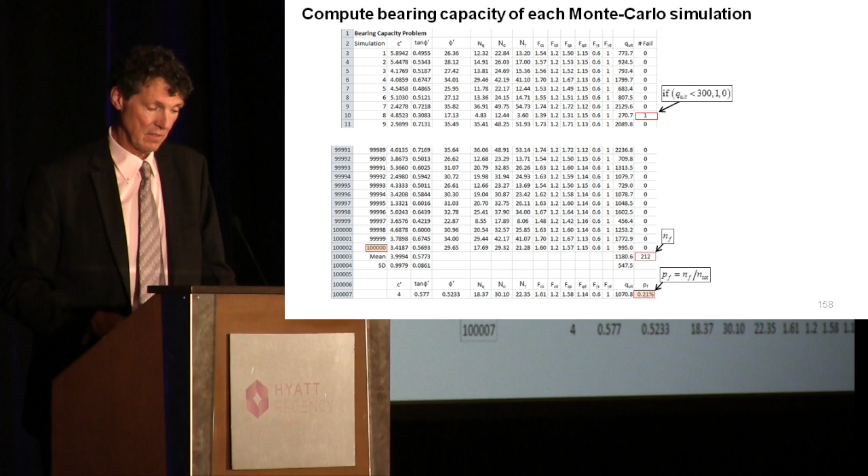We get, in this case, about 212. We divide that by the total number of simulations - it's as simple as that. And we get a probability of failure of 0.21. I didn't cook it, it just came out the same. Really what this tells us is that the FORM assumption of linearity was a good one, and we got the same result. If the FORM assumption is bad, though, for whatever reason, then the Monte Carlo is the way to go, because there's no assumptions really - we just hammer away and get an answer. It'll get there in the end.

This is the problem we just solved, showing little black dots for all the cohesions and tangents of friction angles. The black line is the locus of failure. Any dots that lie below the black line indicate failure, and any dots above the black line indicate it didn't fail.

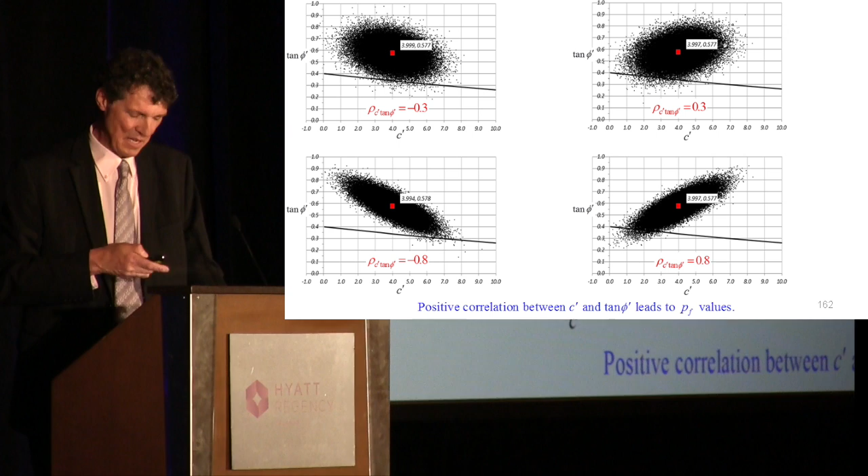You can see the role of the cross-correlation very clearly - it's like an Andromeda galaxy, isn't it? The correlation orients this ellipse. Positive correlation actually is more conservative - positive correlation leads to a higher probability of failure. So if you don't know anything about the correlation between cohesion and tangent of friction angle, you might be well advised to make it positive to be on the safe side.

Finally, just a few slides about a more research-oriented approach to probabilistic geotechnical analysis. This methodology was developed in the mid-90s, in the last century - not that new. It was based on random field generation theory, which has nothing to do with geotechnical engineering - it's just a way of generating a random field spatially.

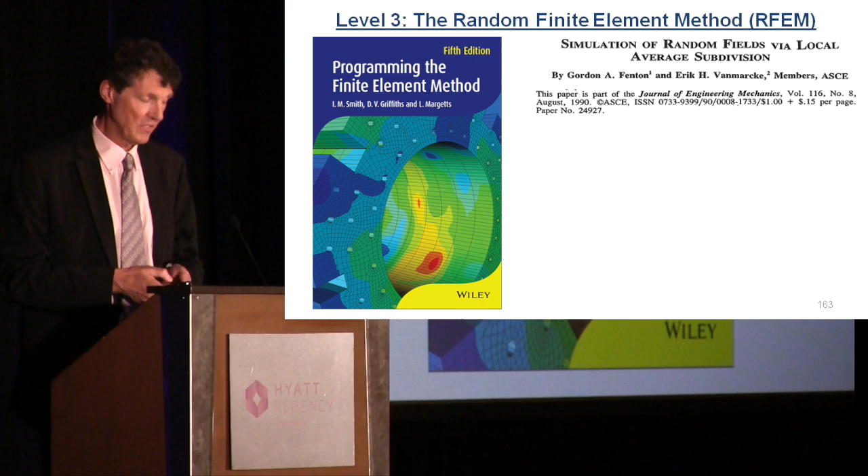We were working with Gordon Fenton from Dalhousie University, who was a student of Vanmarcke at Princeton. We then mapped the random field onto conventional finite element programs, and combined the two methodologies. And then you do Monte Carlo.

One thing this method does that none of the other methods mentioned does at all is take account of spatial correlation. If I drill two boreholes in opposite corners of a field, the property I measure is less likely to be similar than if I drill two boreholes close together. There are spatial trends in the ground, especially in stratified soils, with much stronger correlation horizontally. This random finite element method can account for that spatial effect.

All the programs are open source, as I mentioned earlier. Actually, the programs have been incorporated into one or two proprietary codes now as an option for those who want to do this.

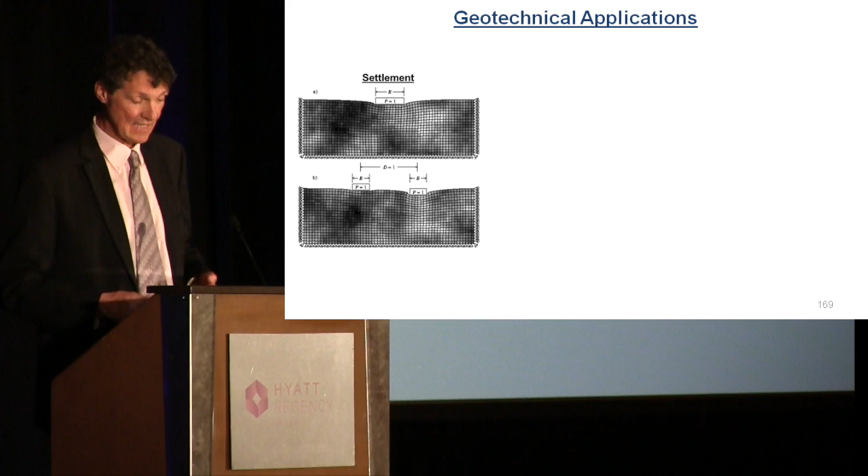We have discovered many different applications within geotechnical engineering using this method. Settlement, or in particular differential settlement, is a very interesting topic, where the gray scale, the white zones mean more compressible and the dark zones mean less compressible. These are all published. Bearing capacity, seepage - we get wobbly flow nets when we have random permeability. I often joke with the class that if they drew a flow net as good as that for a uniform soil, I'd be quite happy.

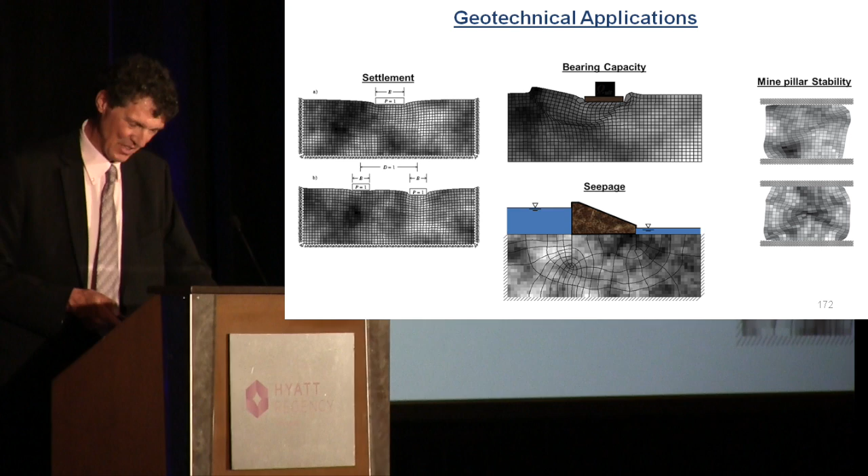Mine pillar - I'm at Colorado School of Mines, so we do a bit of mining too every now and then, though I'm in a completely different department to the mining. Earth pressures, bearing, earth pressures active and passive, laterally loaded piles where the p-y springs are random, and of course slope stability.

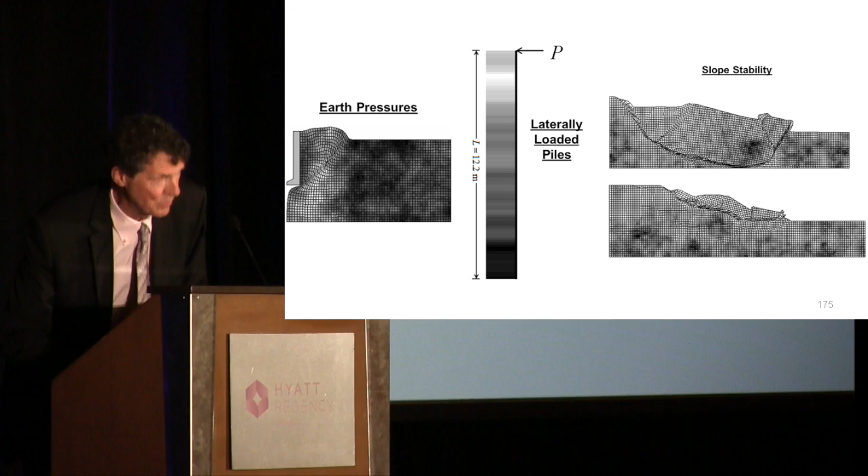In this last slide we have two simulations from a Monte Carlo set. I picked these because they look nice, they're interesting, but two simulations with very significantly different failure mechanisms. Both simulations have exactly the same mean, standard deviation, and spatial correlation, showing that where the weak zones happen to be is where the mechanism will be triggered - the seeking out effect is shown very clearly. Spatial correlation is shown in this figure as the width, the tendency for similar properties to be clumped together. We can do anisotropic as well, but I haven't got a picture here.

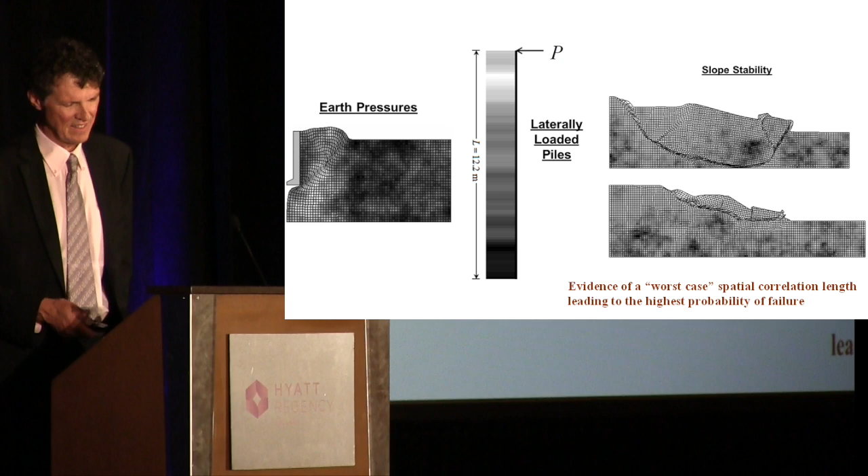This is an area of ongoing research which I'm not going to dwell on today, but spatial correlation length is probably the least well understood of the properties you need for a risk analysis. We've observed in several applications that there's a worst case spatial correlation length that leads to the highest probability of failure. This is very interesting because if you don't know any better, you should choose the worst case value to be on the safe side. I think it's a very significant finding that we'll revisit again in the future.

Let me conclude with a few comments. Fairly obviously, finite element methods remain the most powerful tools for modeling variable soils and for probabilistic analysis with variable soils based on an underlying statistical description. We've demonstrated a couple of fun examples, if you like, for 3D and long slopes, and we asked how long was infinity.

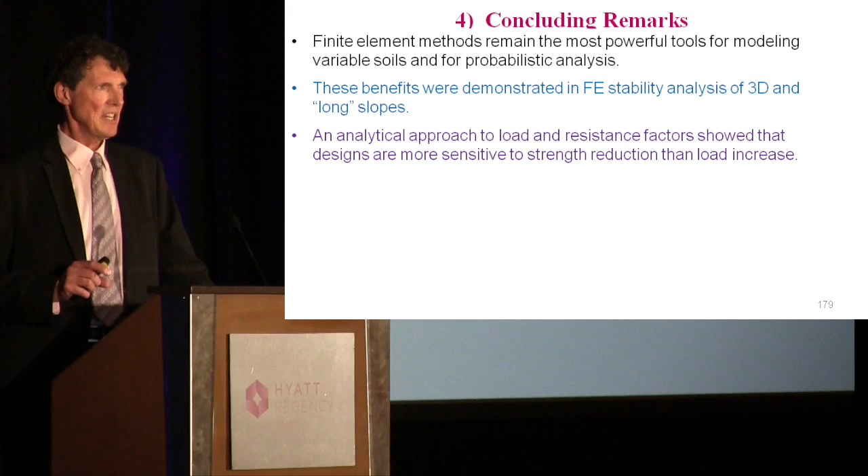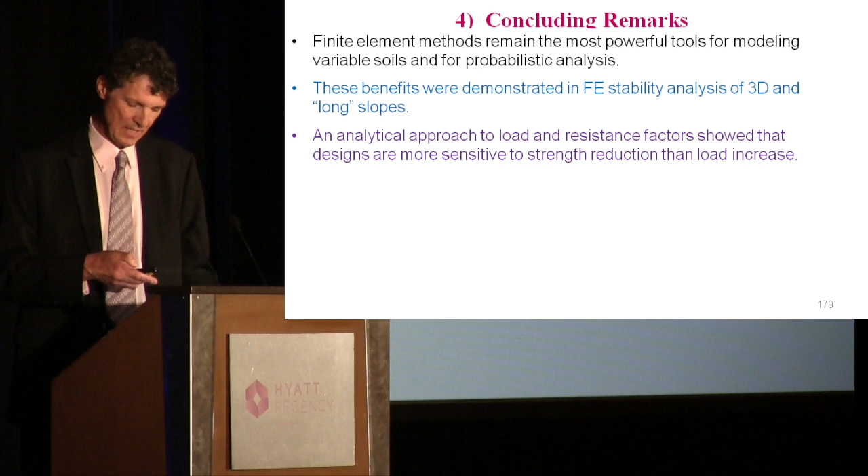I digressed a little in the middle and talked about load and resistance factors. We showed that resistance factors - dividing strengths by 1.3, let's say - will have a lot more influence on your result than multiplying the loads by 1.3. Designs are more sensitive to strength reduction, and this is why we've got the 1.5 for slopes and the 3 for bearing capacity in the textbooks.

We have a whole toolbox of methods, and there's plenty of software out there, including some introductory ones on my website if you want to play with them, ranging from event trees, which are really the state of practice at the Bureau of Reclamation and elsewhere like NGI, right up to Monte Carlo simulations with finite element analyses that involve supercomputers. We have the whole gamut. We've indicated the worst case - I haven't dwelt on this as much, but I wanted to mention that spatial correlation seems to be important in some problems. As I mentioned, you can go to my homepage and grab any of these programs, or contact me and I'll send them to you.